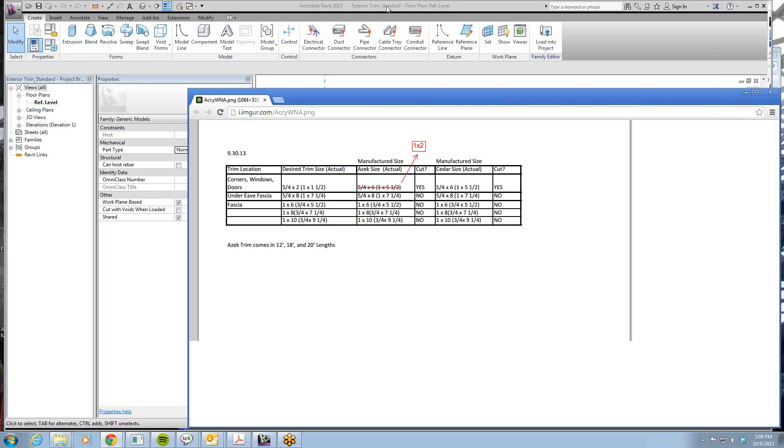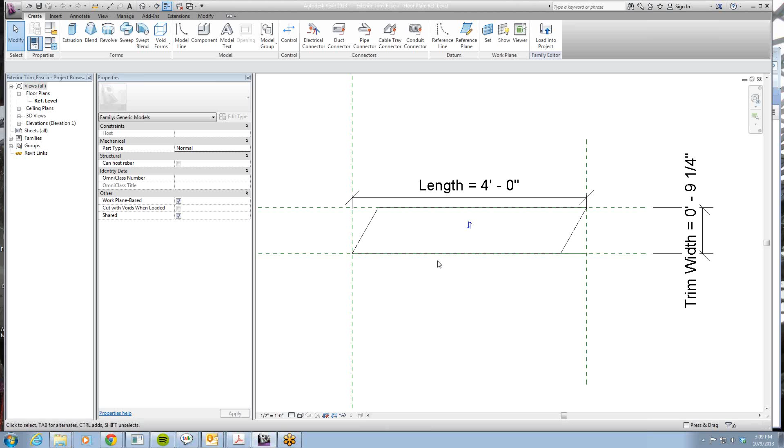But I'll go into the Revit families now and show you how we're going to break it out into a standard window, corner, and door trim family—exterior trim standard—and then separate that from a fascia trim family, which has the option for a plumb cut at the corners, so we can use it both for the roof fascia and the under-eave fascia, and have it cut at the corner board nicely so it doesn't extend out in our drawings and look bad.

So I'll show you an example of how it works in here. This is actually the Breeze Atrium Revit file I've been working on with NOCT and product development, and I've been testing these new trim families in here.

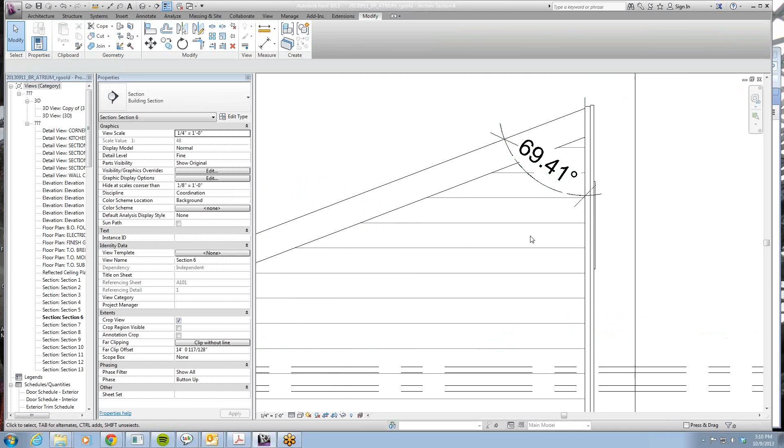This is the exterior trim fascia piece with a plumb cut angle of 69.41, which will be different for the range of products. So you got to find the angle that you need from the angle of the roof and the straight down angle of the wall. Then from there, you can input that angle into this instance parameter of the family.

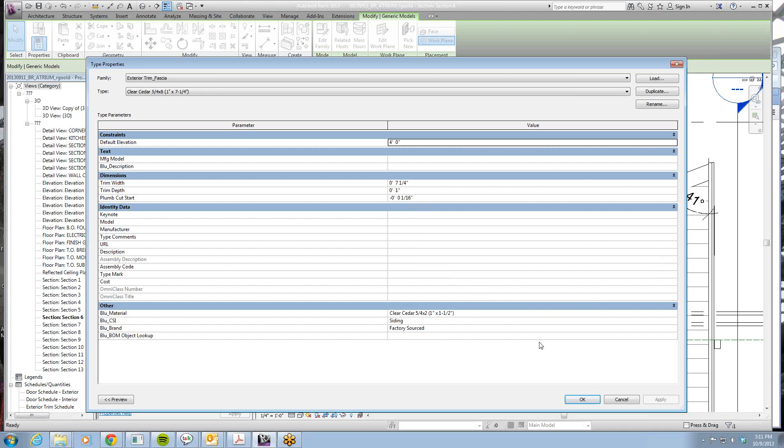Now, the family also has a type parameter called plumb cut start, which actually starts a negative 16th of an inch behind where the back face of the trim is. That's so that any piece that needs to be the same type so it joins correctly, but doesn't want the plumb cut, you can set the plumb cut end, which is also an instance parameter, because you'd have this instance of the same board that wants a plumb cut and this one that doesn't.

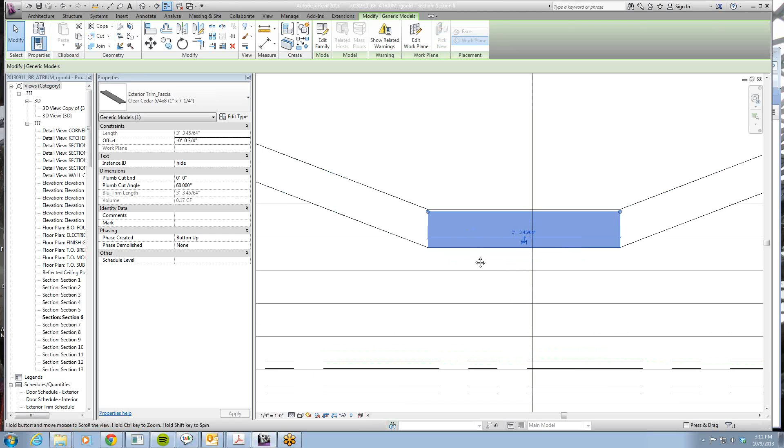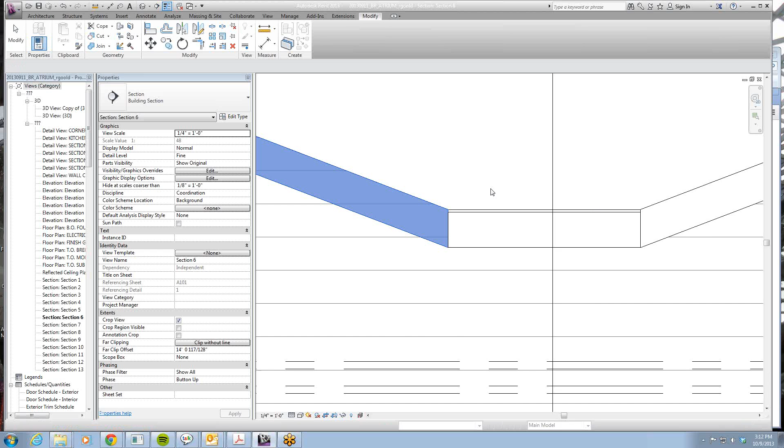You set the plumb cut end to 0 so that the void extrusion doesn't cut out any of the actual geometry of the trim, but you still have that as an option for the other instances of that type. If I were to set this to the other trim family, it wouldn't join correctly. Even though they are joined, there's still a seam there because it's not the same family. So that's why I had to do that.

Now you see, if I switch it back, it automatically defaults to the 60-degree plumb cut, but I can negate that by changing plumb cut end to 0, and then you get a nice seamless transition.

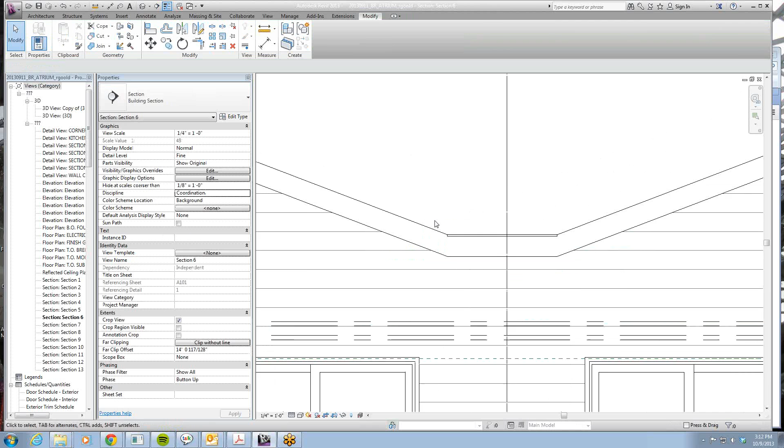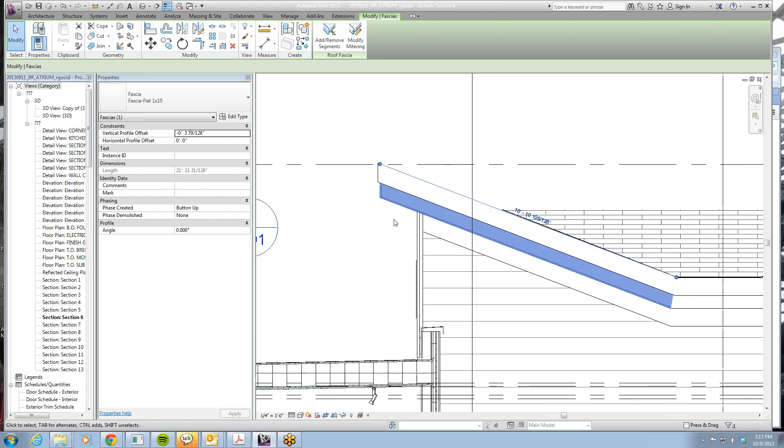So you can also use it for the fascia boards on the actual roof. Here I haven't actually done that in this family, but as you all probably know, those fascia boards are all 1-bys, so the 3/4 inch by 8, 7 1/4, 9 1/4 for 1x10, so that we get the right finish up there.

That's pretty much all I have to show, I think. Does anybody have any questions?

Hey Ryan, it's Michael. I think it's great. I mean, we obviously needed to standardize this stuff for a long time.

Another type of trim we should consider is trim that's like, say, under a door in between a deck, where you'll start with obviously a stock size, and that's what you want to put in the model so that the part would actually be cut to whatever that depth is.

Because I know that height can change depending on the project, it would be good to have a trim that has the width as an instance parameter also, so that you start with your 1x6, but you cut it to an actual 4.5, right?

Yeah, I wonder if that could just be like a per-project thing. Does that want to just be like you have the standard types in the family in your project, and then you duplicate a type so that you can put in the family name or the type name, like it's this standard size, but it's ripped to this.

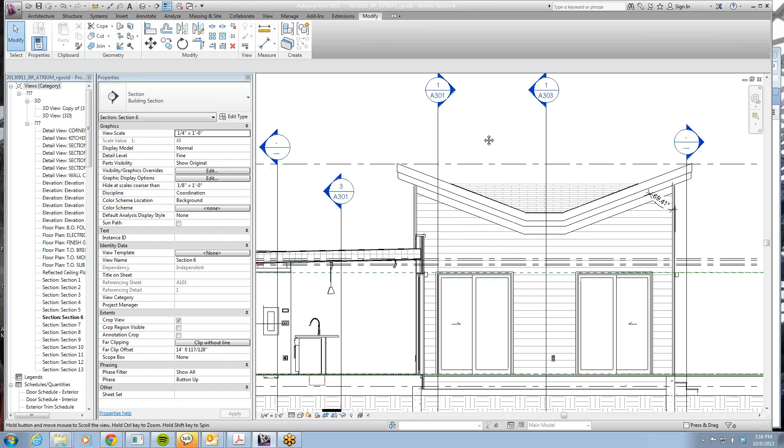Yeah, definitely. Just too bad. And then I guess the way you have the families set up, it's not that it's labeling it there as for fascia or eave trim. It's just called exterior trim, right? Or yeah, is it? Okay.

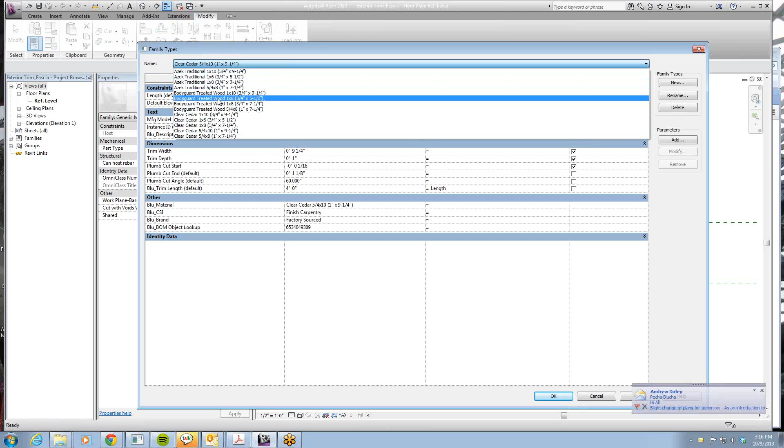So then I think that works totally fine. You pick the piece that you want based off of what's in the family. Yeah, the Revit family is named like exterior trim standard, exterior trim fascia, but the types within the family are all the standard naming, and they're the same across the two different families.

So, right, okay. Yeah, that works. So you just pull the one that you need, and then you can...

Okay, cool. I guess while I have you guys here, I will also show a little bit of what I've done to window and door families, editing frame geometry for those.

Some of you may or may not know that we're working through a system where we're going to take Revit models into Max and then do rendering and walkthroughs from those Revit export to Max models. And that's how we're going to release the Breeze Atrium, as opposed to developing the configurator for it. It's just going to be the standard layout with a Max walkthrough.

Part of that whole process means that the materials set in Revit have to be portioned off to be as close to rendering ready as possible. The way our windows and doors were set up previously is that the frame was one solid piece, interior and exterior, and it may or may not have had the Blu material assigned to that specific extrusion in the family. So instead of just going through the families and making sure that the exterior material parameter was assigned to those extrusions, I did some editing of the geometry so that we get a separation of the interior and exterior frames.

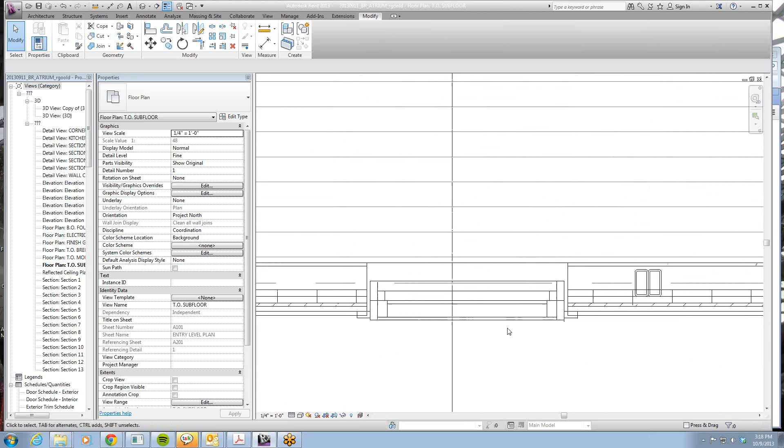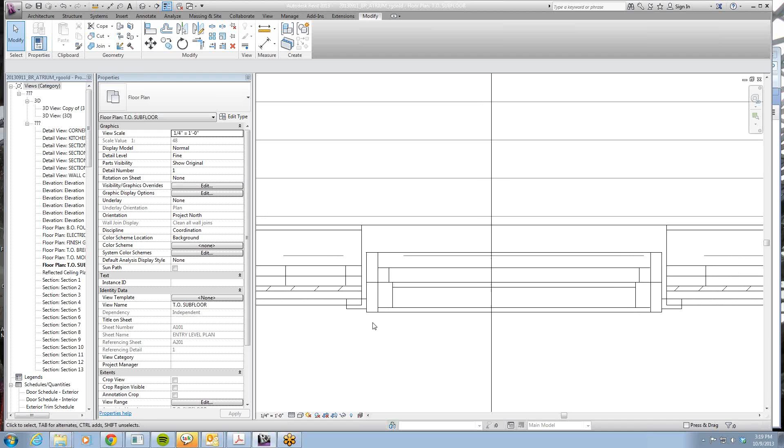I also went ahead and tried to get close to what the Rhino rendering team has been showing for their window frames, in terms of separating an outside frame from an inside frame. You can see here in these new window families that you have a separation of interior and exterior there at the back face of the glass.

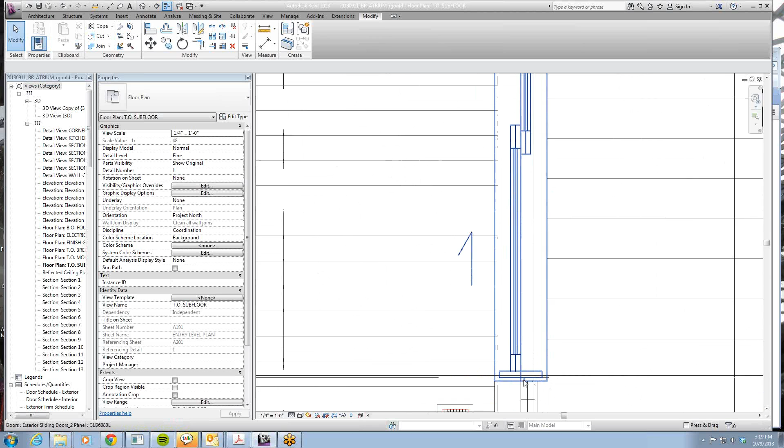So these two extrusions are set to take on the material properties of the Blu interior material parameter that we set for our schedules, and then these two extrusions on the exterior take on the Blu exterior material parameter. Same goes for doors. I'll just show the sliding door as an example. So the jamb and the actual frame of the slider is separated between exterior material and interior material.

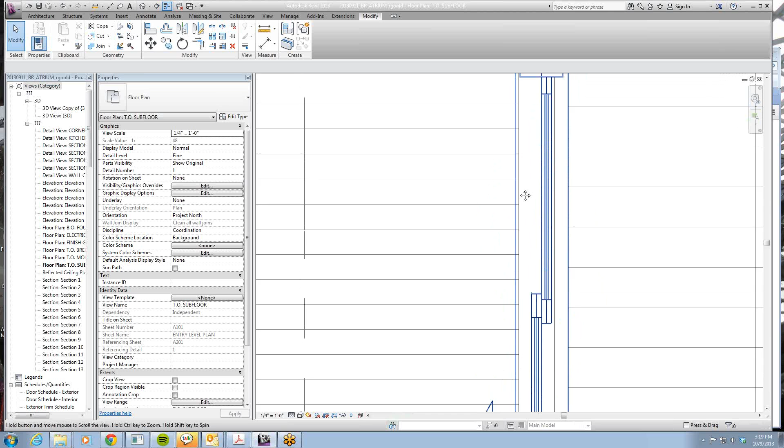It's not perfect, it's not accurate to what the Andersen or Therma-Tru windows and doors actually are, but I think for rendering purposes and walkthroughs and such, this is as accurate as we need it to be, and it doesn't screw up anything in terms of our Revit drawings or modeling standards, other than showing an extra line through, and I think that's not a big deal.

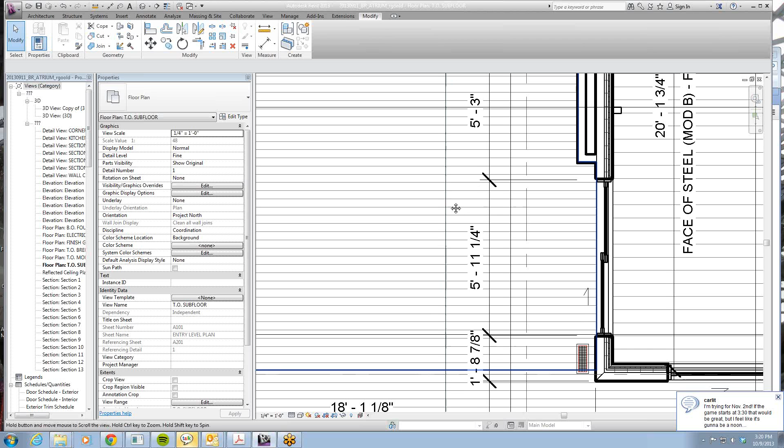Luke and I agree on that. I'm going to throw you under the bus there and say that's fine. Yeah, we talked about that. I think that's so minor that I'm not too worried about it. If anybody really has a problem with it, we can discuss it later, or you can write me an angry email. But yeah, that is very low on the priority list of things to fix.

And I've tested it for all the different window and door types in this file. These are just like neighborhood monopoly houses that I had to build in here for the Revit walkthrough of the atrium. So I just placed some random window families on here, and they seem to be working. Nothing broke as I placed it.

So I'm going to roll these into Blu Standard, and if you guys find anything that breaks, just let me know. Let Luke and the other Revit managers know, and I can fix it or someone else can fix it. We'll get it resolved if you find problems.

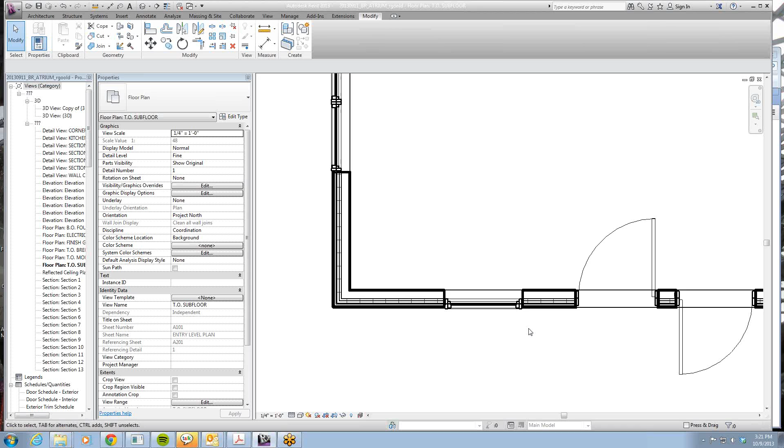To be clear too, this seems like something that we don't need to retroactively fix our windows and doors on current projects, but if we put it in Blu Standard and you need to reload from Blu Standard for another reason, it will come in and make that change. So you may end up with some new versions and some old versions depending on what you reload. But I don't think it'll affect anything if you have that mix of old and new things.

The only reason you would absolutely have to reload all your window and door types for this purpose is if your project has gone through the whole process and you're actually going to develop a walkthrough with Jeremy and Josh, and that's pretty far off for any of the current projects we have, so I don't think it's an issue.

Yeah, I've actually seen what they've done with this model already. It's really cool, really exciting. And Josh sent me a link to a thing for virtual goggles. So yeah, we're gonna have some virtual goggle walkthroughs of Blu Homes for clients, which is awesome.

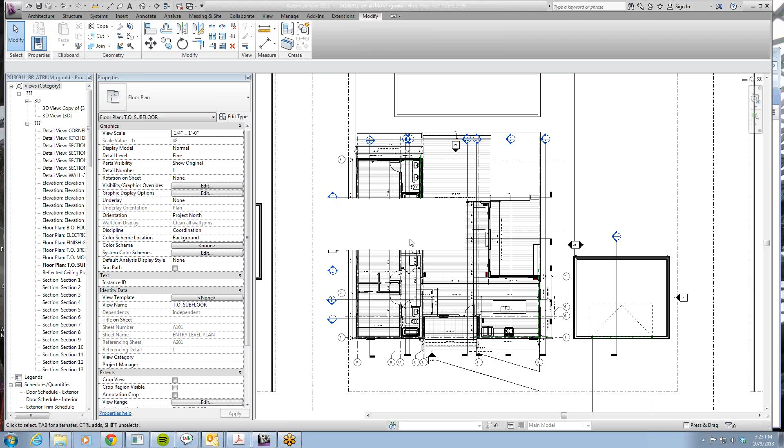Where's it says you're the organizer. Yeah, I'm the organizer. It also says Sean Houghton is the organizer, but I don't know. So I'll just do that. Okay, that came to me. Cool.

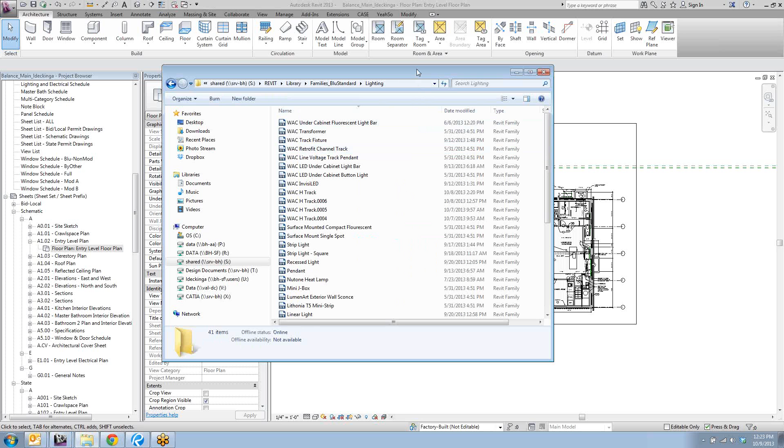I should have gotten ready. So the other family update, most people saw yesterday we were talking about the H-track connectors. I'm going to bring that up and show you what the change is. The other thing I wanted to talk about is, last week we discussed linking two models together as a potential way of combining seed models into a project. I haven't worked out all the bugs, but I've figured out what the challenges are going to be, and I wanted to show you what I've figured out and get some feedback. But those are the two things I wanted to talk about today.

But first, let's look at the H-track connectors. I'm not sure exactly how these were working before, or whether they were working, but they are now updated.

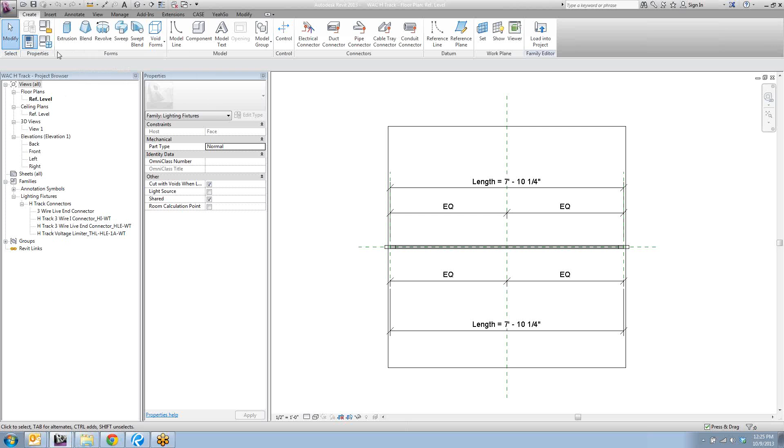So this is the H-track connector family. There were two parameters before, connector 1 and connector 2, selecting a nested family of type lighting fixture. H-track connectors is loaded into the H-track family, and these are the different types. There used to be a none type, so if you only had one connector, you'd set the second one to none. But now we have two checkboxes, connector 1 and connector 2, which turn on those connectors. If you only have one, just uncheck the second box. If you have both, leave both checkboxes on, and then select which type of connector you have in those parameters that were already there.

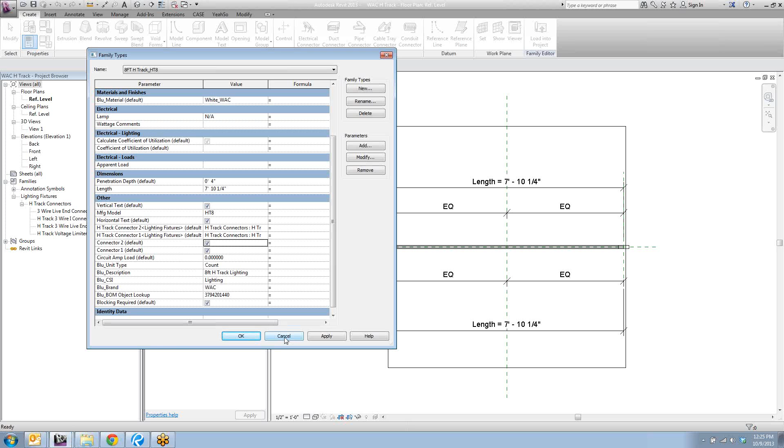Yeah, so that's about it. Oh, there was one other type of connector that I made. Sean here needed a voltage limiter for a project he was working on, so I added that as a connector type. So yeah, live end connector, I connector, and I don't remember what that one is.

And Luke, that voltage limiter is going to be standard in all kitchen pendants for California projects. Okay, excellent.

All right, that is that. Any questions about those? Have you guys been using them? I guess I thought they were indirect parts being pulled through, but because you have to change them based on what you need, they couldn't be indirect. So now you have to actually choose them.

Linked models - here is what I've figured out. I'm working in the balance model right here, and this is a loft house model that I've linked in. I've made copies of both of these so I don't screw up the actual seed models; both of these are detached versions of the seed models.

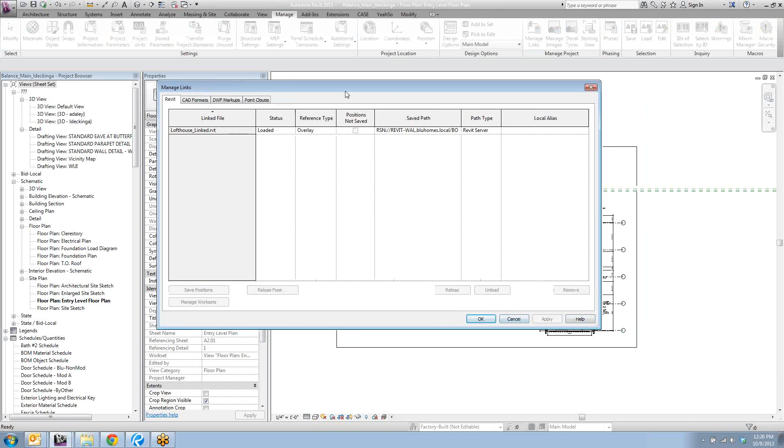In my manage links, I have this loft house file, and as we discussed last time, it's linking to the model which is on the Revit server. The way you'd work on both of these is you have your local version of this, and your local version of that. If you're working individually in either file, you're working on your local version and syncing back to the Revit server just like normal. But when you link the loft house into the balance, you point it to the Revit server, and that way it allows multiple people to work on the same file.

So if I open the file and I'm working on it, and I have the link to the Revit server rather than to my local loft house model, when Kevin opens the model - instead of, if I was linking to my own local version, it would open on his computer and say can't find the link, because it would be called whatever the model is, underscore ldeckinga - so linking to the one on the Revit server solves that issue.

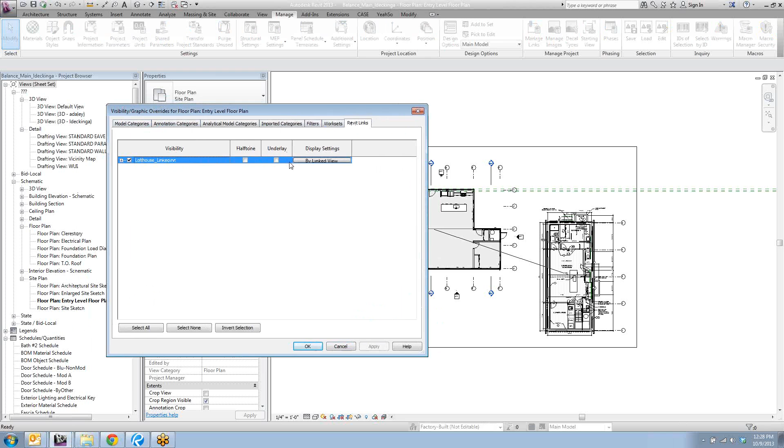There are some things which are really nice and fairly easy to do in terms of setting the visibility of the linked model. In your visibility graphics overrides, if you go down to the end, if you have any links, it says Revit links, shows me my linked model. I have it set up here to say I want to display this linked model in this drawing. I think it's by host view by default, but you change it over to by linked view, and you can change it to be whichever view in the linked model you want this to show up as. So I know that this one is lower level plan.

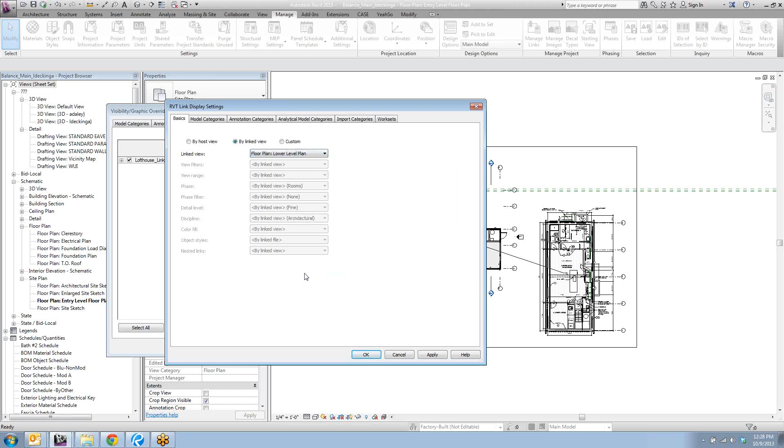Okay, actually, maybe it was a different one. But basically the idea is that as long as you have your view set in that linked model how you want it to show up, you can set it in your hosted model what that's going to show up as.

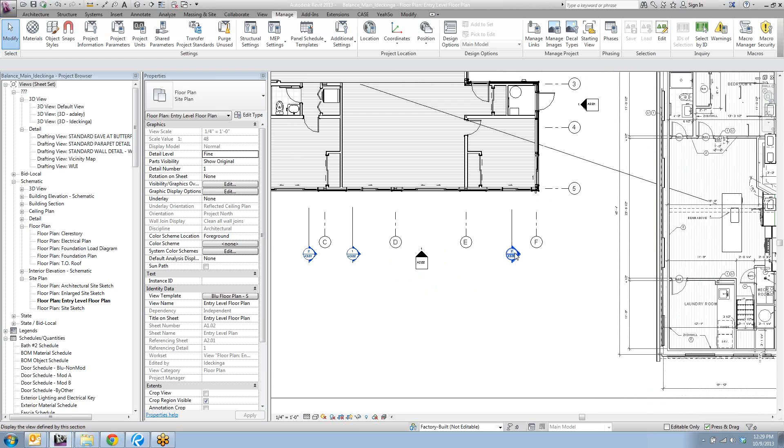The one thing that doesn't come through that I noticed is all of your view callouts. And it sort of makes sense that they don't come through, because you could have a view in here which is on page A302 and a view in your host model which is on A302. So you could have two callouts which are referencing the same page that points to two different views. I think Revit will probably not let you show the view callouts in the linked view.

So that's something that we'll have to deal with, but I don't think that's an insurmountable problem. We may just have an overall architectural site plan and do one callout and say this floor plan is on one page, this floor plan is on another page, and then within those enlarged floor plans you'll have your view callouts. So that's something to be worked out, but just to let you know, that's one limitation—you can't see view callouts in a linked model.

You can, however, show sheets from a linked model inside your host model. Just like we looked at it a little bit at the end of last week, in your schedules there's this little 'include elements in linked files' button. It works the same way for a sheet list as it does for other schedules.

So you'll have to go into the linked model and rename your sheets so that you don't have duplicate sheets of the same name. I haven't actually worked in that Lofthouse model too much, but my guess is we probably have some duplicates. I can't find some right now, but yeah, in any case, we'll have to work out our sheet numbering.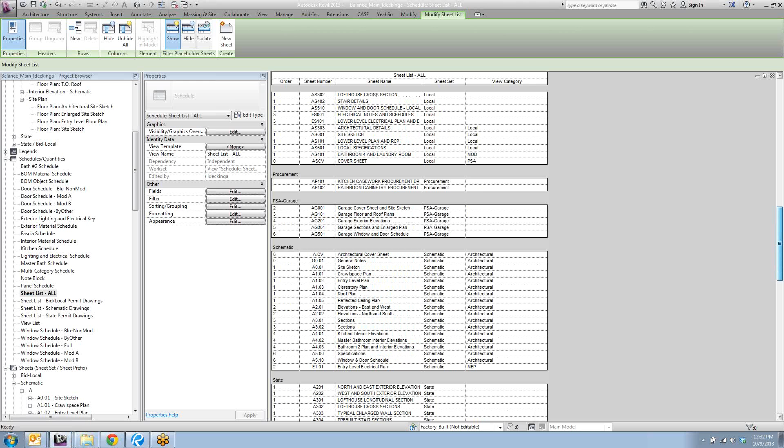Oh, I have these separated out by sheet set right now, which I think is why I'm not getting duplicates. So I have, let's see, bid local, yeah, contract has an A401. Anyways, you get the idea.

The other thing that you need to do is—let me see if I can find this—there's a way that you can link your phases from one to the other. So you can say the phase in the linked model corresponds to a certain phase in your host model, and that way all of your visibility settings will show up and be correct across the two models. I forget where that is, that might be in your phases.

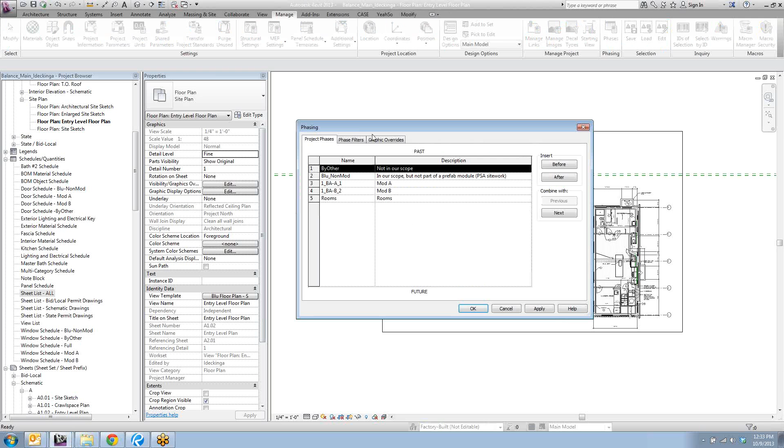Anyways, the only—so here's, let me pull up, I made some notes for this real quick.

So this is my thinking so far. In the main model, you'll want to show your site plans. You'll have your master sheet list for everything. You have your schedules, and make sure to use that include elements in linked files button. And then for your exterior elevations, you'll probably want to make those in your main file because you want to show everything together rather than showing an elevation for one and an elevation for the other.

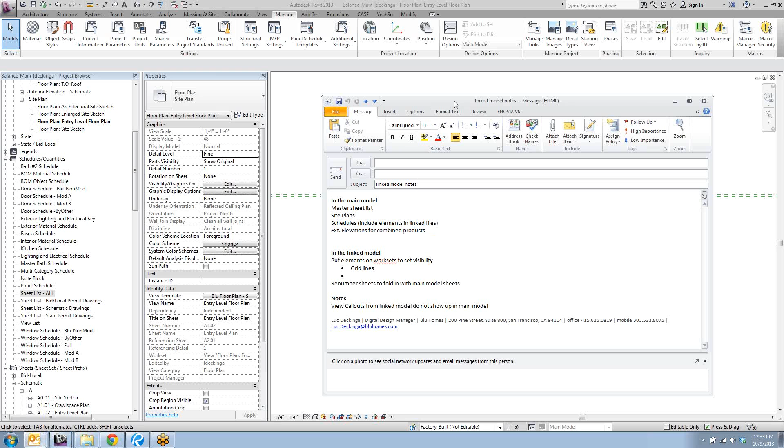And then your site elements you'll want to keep inside your main model. And then only the interior views, like your enlarged plans, interior elevations, those sorts of things, are going to be the views and sheets that you will print from your linked model. But all of those sheets will be listed in the sheet list in the main model.

That's as far as I've gotten right now. I wanted to get a sample couple of pages together, but I ended up running out of time before I could show it to you. But yeah, I think this is the way we'll want to go.

I've been having some problems with model groups, both trying to load an entire product as a model group, as well as moving around some of the model groups for kitchens that we've been developing to use in seed models. There's sort of hosting issues and constraint issues that we're still trying to work out. So yeah, that's where we are with these sorts of things.

Is anybody working on a project right now which it would be helpful to link two models together? Do we need to do a test case with somebody, or should we just keep working things out in a theoretical sample realm for now?

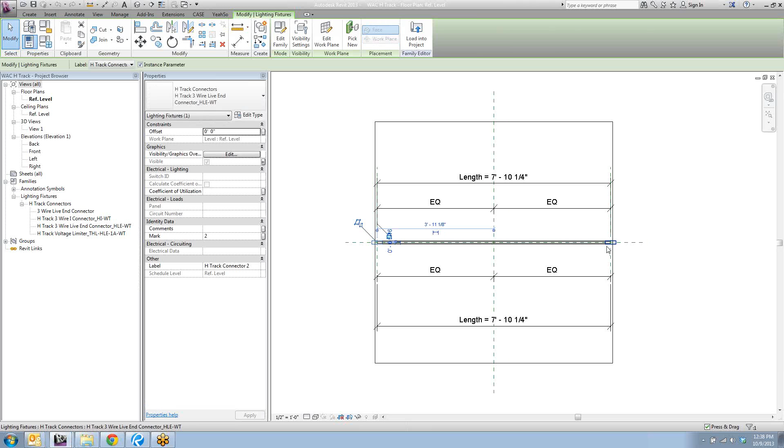So actually, if you have 2 tracks together, you probably only need to assign a live end to one end and an I connector to the other end, and then you don't need to assign anything to the other track.

Okay, what about if you have a 3-way switch, so that you have 2 tracks together, one end of the system is going to one switch and the other end is going to another switch? Is that how that works? I just assumed that it was all wired to the same place and that the switches were just...

I'm not that familiar with this, but I just assumed that it would still be wired just to that one end connector for the system. Yeah, oh okay. I think just graphically there, it's probably shown that way just for clarity, like the lines coming off of each end. Yeah, okay, that's less confusing now. Thanks.

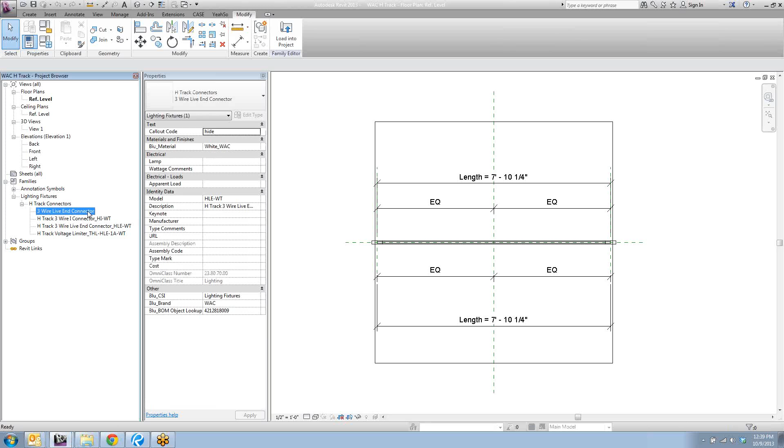So wait, just to be clear, if you have 2 tracks, between those 2 tracks, whether it's a 3-way switch or not, you have one live connector and one I connector, and that's it? Yes.

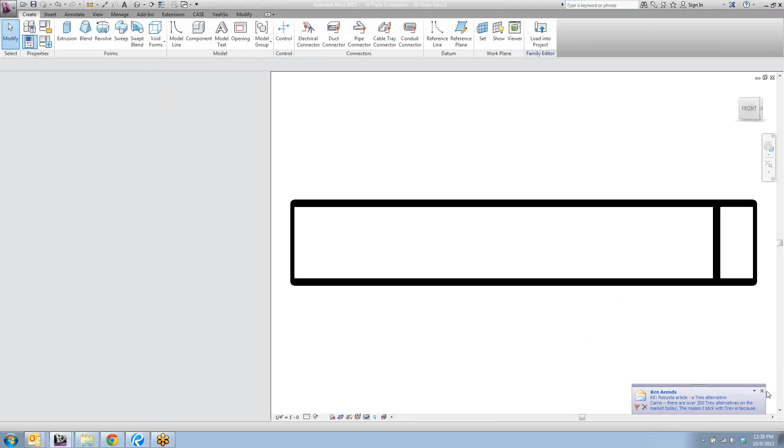And I guess a secondary question is, does it matter what's number 1 and number 2? It's just a matter of having the quantity, right? Yeah, that's correct.

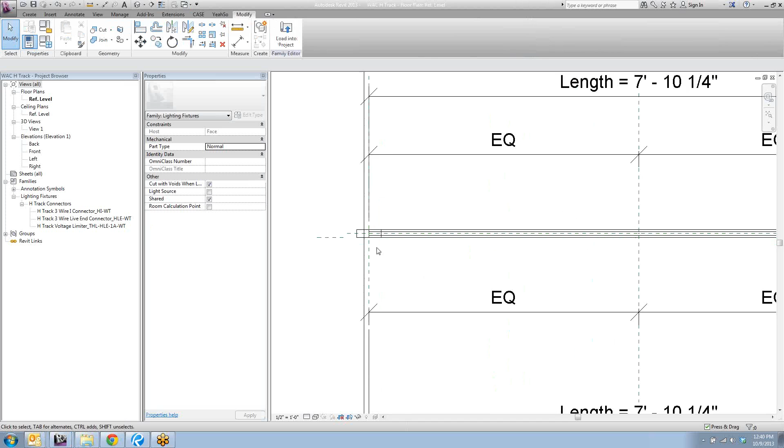Okay. Yeah, so before these weren't actually modeled as physical pieces, I've added them. I forget which is which. I think that one's number 2 and this one's number 1.

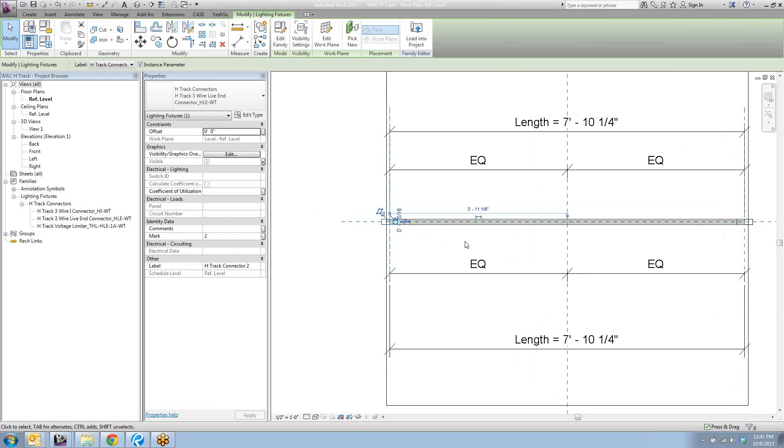And so if you have 2 connected together, you can either have this connector on your first H track or the opposite one on the second H track. It doesn't really matter as long as the quantities are right. You might get a weird Revit error about having two things in the same location, which might result in double counting in schedules, which I've seen so many times I can quote verbatim.

And it doesn't really matter as long as you have the quantities right. But if you put two H tracks together, you might have number one on one and number two on the other in the same place. We don't really care about that as long as you know that you have the right amount selected and the right types selected.

And I guess I'm assuming the factory will determine which end will actually be the live end. It's not really up to us to determine that. Right, yeah, I just put those elements in the model. I think before we had those parameters, but unless you have a physical component that is an instance of that parameter inside the model, it won't actually show up in the schedule. So I just modeled this dummy connector as a placeholder for that. But yeah, the factory is going to determine where everything goes. They don't get any of that from our Revit model.

Any other questions about this or anything else?